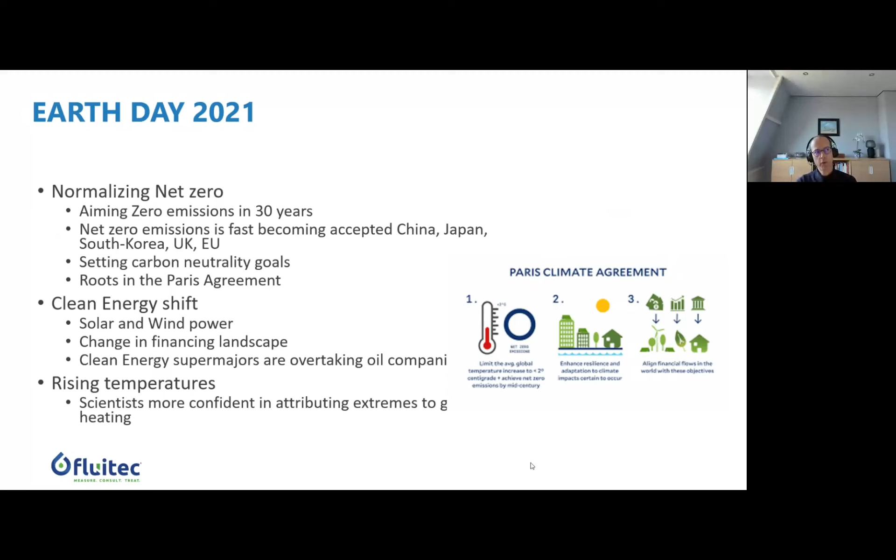And then, of course, let's not forget the super majors - there are big names working on solutions. It's not only about the two first aspects. Now, rising temperatures has been a big debate, I would say, but right now scientists are more and more confident in attributing extreme increases and shifts in temperature to CO2 emissions. If you go to the next slide, please.

In 2017, and there are probably more recent surveys, they found that 85% of large companies were reporting sustainability and corporate social responsibility in their reports. That number, I'm 100% sure, has increased over time. Interestingly, they found a correlation between companies doing something good and reporting it, as well as achieving higher performance. That's something you can see very often.

So yeah, we all agree CO2 emissions need to go down. It's a challenge, meaning a lot of large companies - names such as Ineos, BASF, Siemens, Air Liquide, Fuchs, Shell, Total, and so on - are working on solutions.

So it's good because it's coming from regulations. Obviously regulations are a big driver. A lot is happening in Europe, but not only in Europe. That's why you see European OEMs and big names here, but not only. And that is a good thing.

There are also corporations you would not have seen in the past that you see nowadays. A good example is Siemens Energy working with BASF in carbon management, leading to projects that are highly efficient, I would say, because you really have cooperation of the best minds towards the same goal.

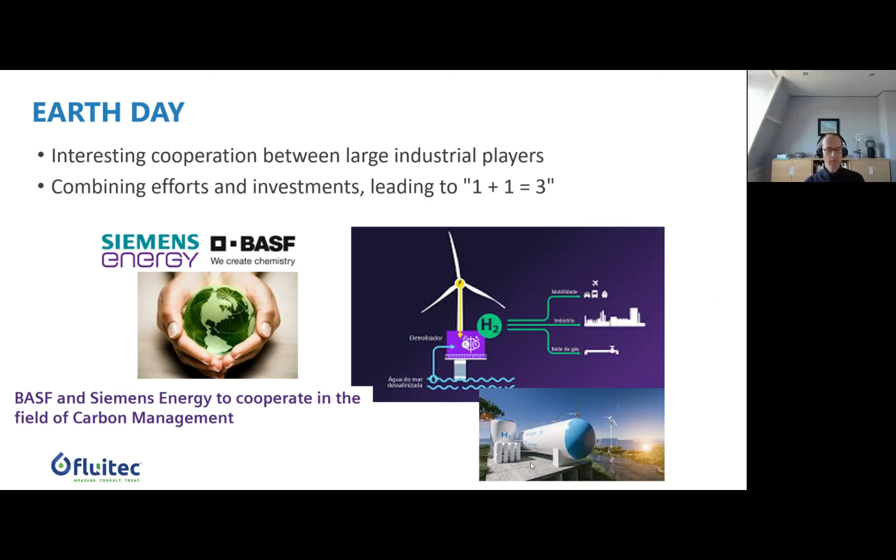So now more specifically about Fluitec. Most of you are familiar with Fluitec. If not, I encourage you to go to www.fluitec.com. Our company is 25 years old. Since day one, we have been looking at solutions that allow us to lengthen the life and improve the performance of industrial lubricants.

By doing this, there are three important aspects for us. One is technical - it needs to be superior products. Number two is return on investment - it has to be the cheapest at the bottom line level, not necessarily the cheapest at the top line, but bottom line for sure. And number three is sustainability.

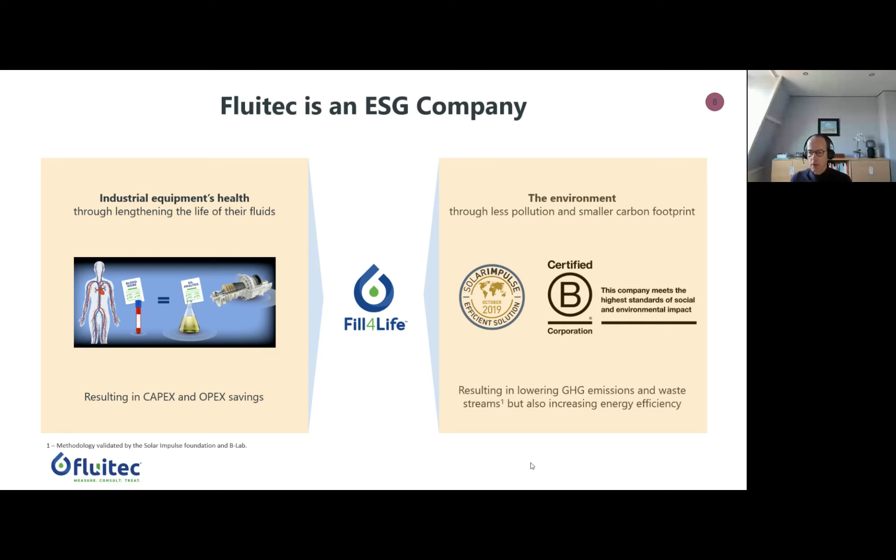Our company, with the concept of Fill4Life, is really at the nexus of industrial equipment health and environment. For us to claim that we have a positive impact on the environment, these are not just words. We have been twice labeled, I would say - the first time in October 2019 by the Solar Impulse Foundation. I'll explain further what they have been doing - great work over the last years. And more recently we were certified as a B Corporation, which I'll also explain briefly.

Solar Impulse, for those who like to read Tintin - I'm from Belgium, so Tintin was one of my heroes when I was a young kid. Tintin is a character from a comic book, and if you like Tintin, there's a professor in it, Professor Tournesol, depending on the translation. This professor is the copy-paste of the grandfather of Mr. Piccard. Bertrand Piccard is the grandchild of the late Professor Piccard. Across 3 generations, each one achieved something significant: one was the first to dive the deepest in the sea, the second went highest in the air, and the third achieved the first round-the-world trip with a plane you can see here, a solar plane.

That was a fantastic PR event. He came back, and to make a long story short, the idea afterward was: what's next? The next idea was, why don't we gather 1,000 solutions around the world that have a positive impact on the environment? So we applied, of course. It went through quite a strict process where they had to be convinced not only that you had a solution good for the environment, but also that you could make a living from it - that it was sustainable in that sense.

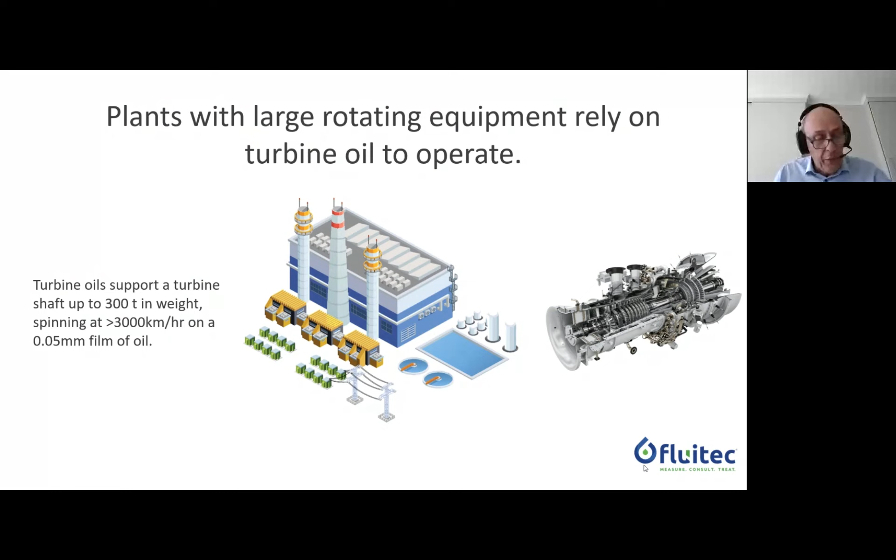If we take an example which is very realistic for everybody, it's a large power plant with volumes up to 30, 40,000 liters of oil, where a specific oil is manufactured following specifications to meet the speed of the turbine and hydrodynamic oil film. All of that has led to specific oil strategies. Over the years, luckily, the industry has moved away from a fixed time oil change interval to a condition-based oil change interval. One of the parameters used for that, as we all know, is monitoring antioxidants, as antioxidants are the number one parameter guaranteeing the lifetime of the oil, the health of the oil.

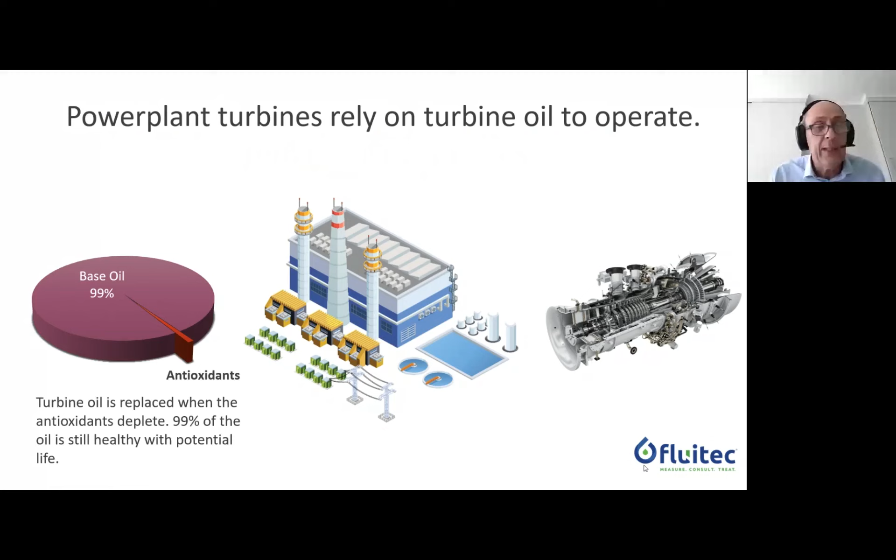So the industry is applying this parameter to understand the oil health, and it's measured today specifically in industry using RULER technology. This strategy, although antioxidants are less than 1% of the total package of the lubricant, is still a very important parameter, and has been leading to a condition-based maintenance strategy, which from an economical and reliability viewpoint is working, it's efficient.

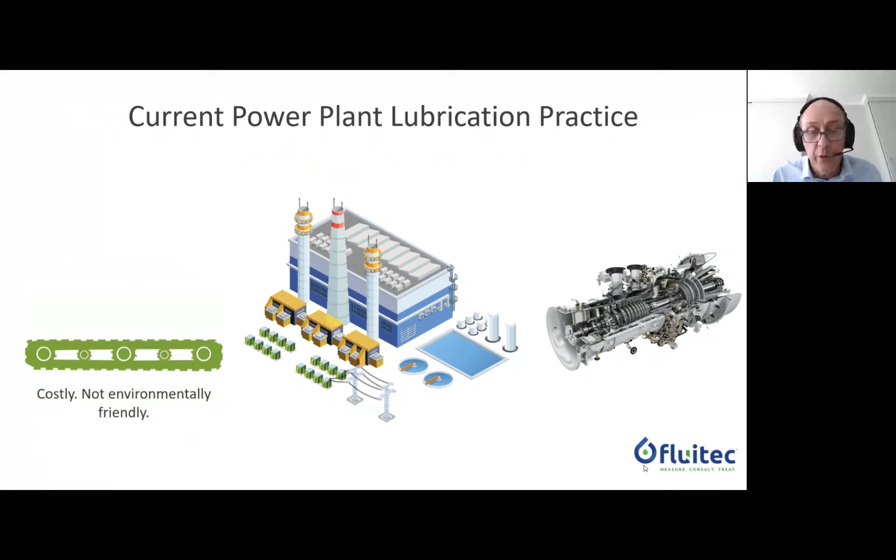But as you can see, changing the oil every time always has a cost, and we can also think about the efficiency of mixing an oil, with the impact on compatibility, or even about deposits. So over the years, we could ask ourselves, is this the ultimate? Well, no, this is not the ultimate. The ultimate is to combine economics with ecology, or if you want, sustainability.

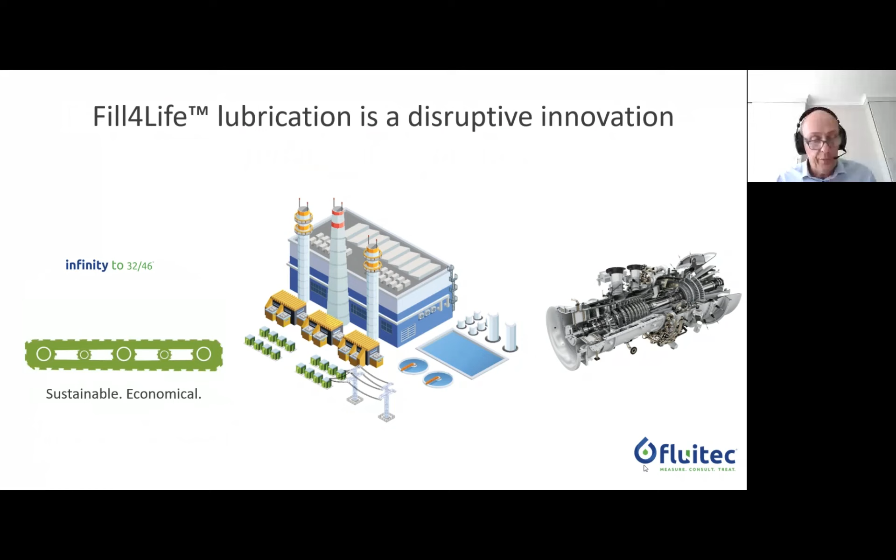And therefore, Fluitec is here as a company to introduce the Fill4Life strategy, in a wide range of industries, as a really innovative approach - for industries like hydraulics, wind energy, steam turbines, compressors, all based on this Fill4Life strategy. And like Josh was saying, and Pierre, this is our small contribution to saving or restoring our Earth.

And if you want to calculate that in metric tons of CO2 reduction or emission reduction, with a corresponding volume of over 10 million liters of oil a year, it is possible, it is achievable. It is also why the program we are presenting at Fluitec, the Fill4Life, has led to the Solar Impulse label we have achieved, as well as the B Corp link. So it is achievable, realistically it is achievable.

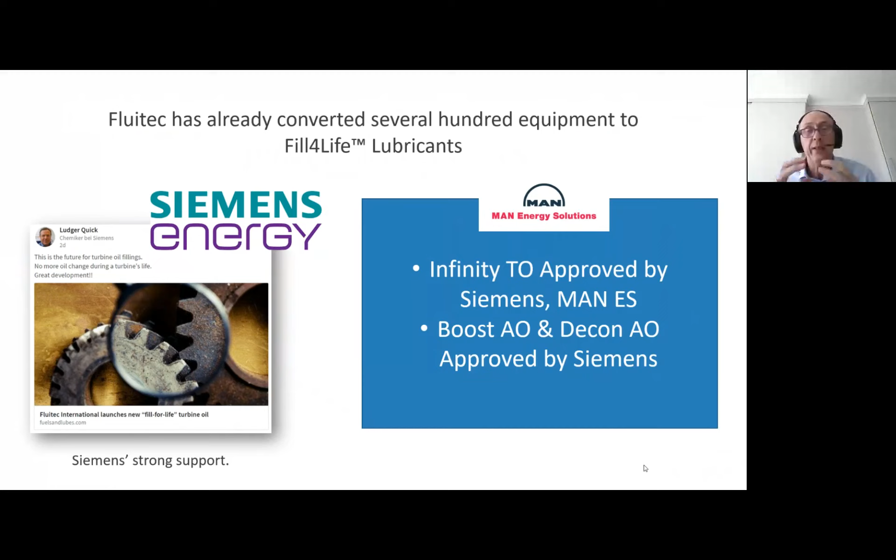And it's not only that we believe at Fluitec in that direction, it's also that over the last 10 years, we have now generated several hundreds of equipment and converted them to this Fill4Life strategy. Of course, with the approach and support from major OEMs like Siemens Energy, supporting the Fill4Life sustainable approach, or MAN Energy Solutions. We continue to innovate with them in order to meet also their sustainability strategies in a joint way, for future or existing equipment.

This was supposed to be a video that was going to show the use of a Fill4Life strategy with a major air separation company, as you can see, Air Liquide. I'm not sure this video is going to work. You will maybe not hear the sound. It's a video who is talking, and you can also find it on the link.

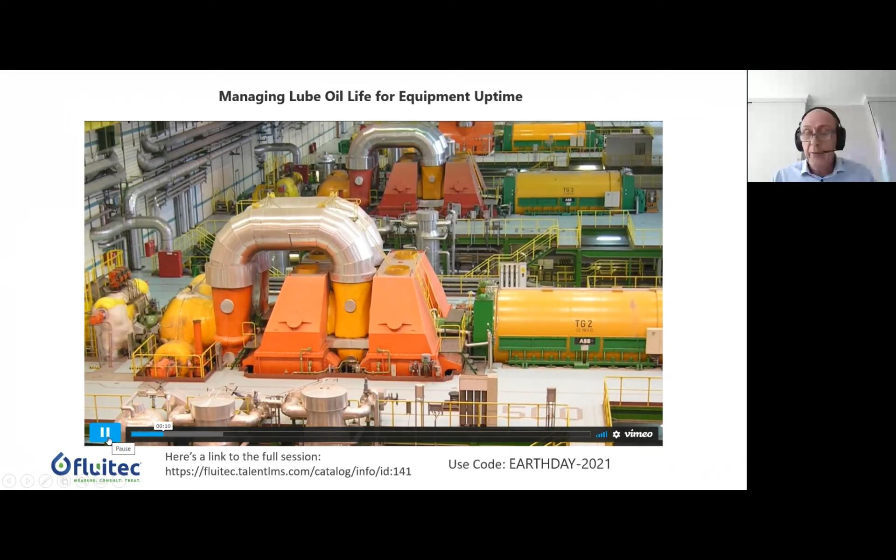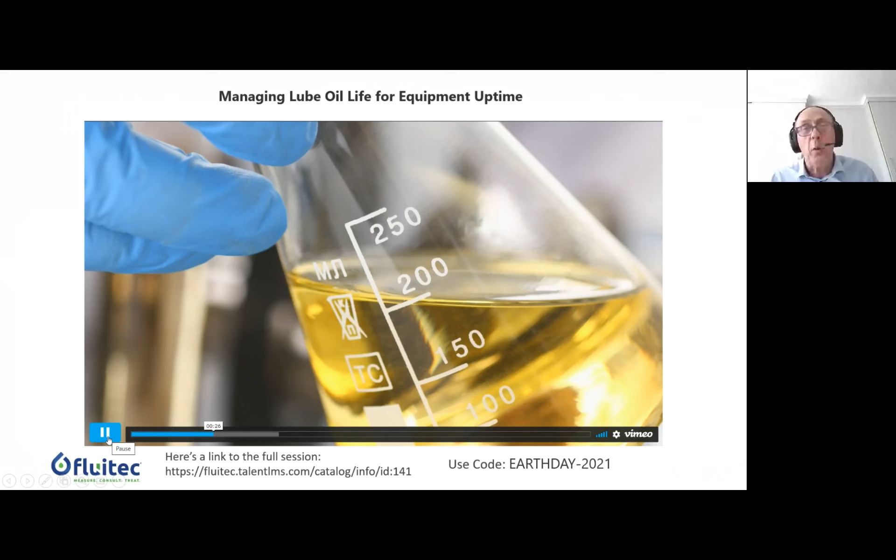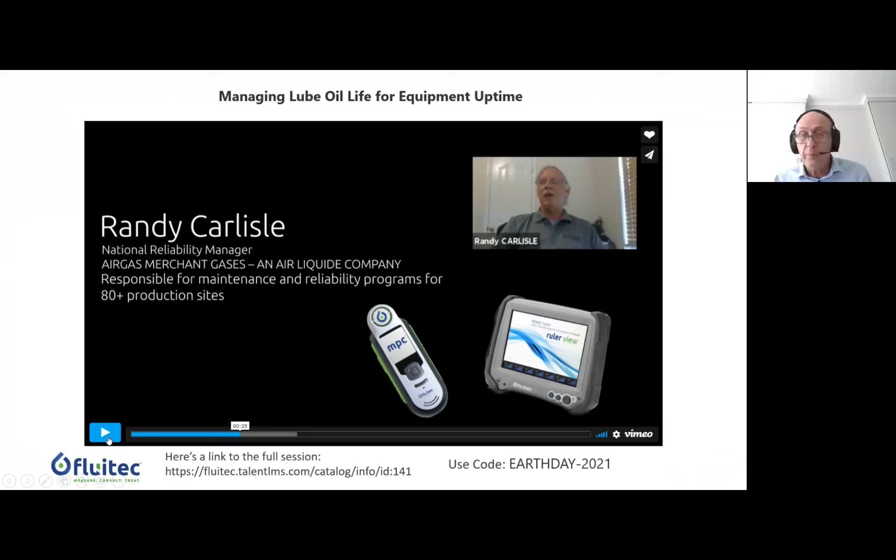It's talking about the concepts—I'll have to move to the next slide because you don't hear the sound. It's talking about the program Air Liquide has implemented for managing lubrication for all their compressors, gas compressors worldwide. I'll put the links to the video in the chat because the sound's not coming through correctly. I just wanted to stop and show this slide where you can also see the results of that presentation. That was also part of our last year international event, the Lubrication Reliability Virtual Summit, which is a strong testimonial on this Fill4Life concept.

For over more than 80 production sites where it has been integrated, which proves that the Fill4Life concept is ready to go. It's available at Fluitec. The Fill4Life concept is based on three main pillars: make sure you always monitor the lubricant, measure that. From this information you can also take the right actions, consult, and then from that consultation move to specific maintenance actions like lifetime extension, which we'll show you in a few minutes, or cleaning the lubricant and removing oxidation products. These three major steps are like the basic stones for building up this Fill4Life strategy. If one of them is missing, it will possibly be more difficult.

And the path to Fill4Life at Fluitec is paved with 25 years of experience, research, development, more than 100,000 oil analysis test results from a wide range of industries, starting in '95 until now. It has also helped us perform a lot of root cause analysis, understanding how lubricants are degrading, differentiating the degradation process.

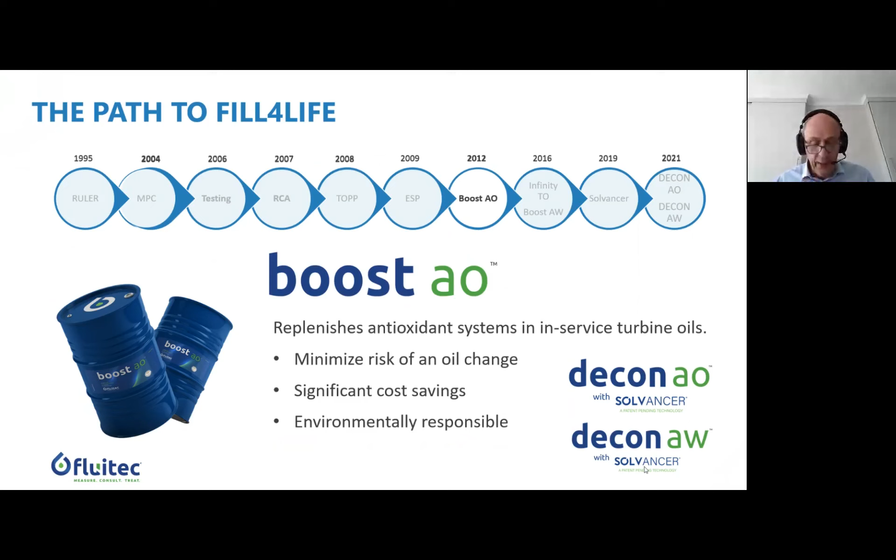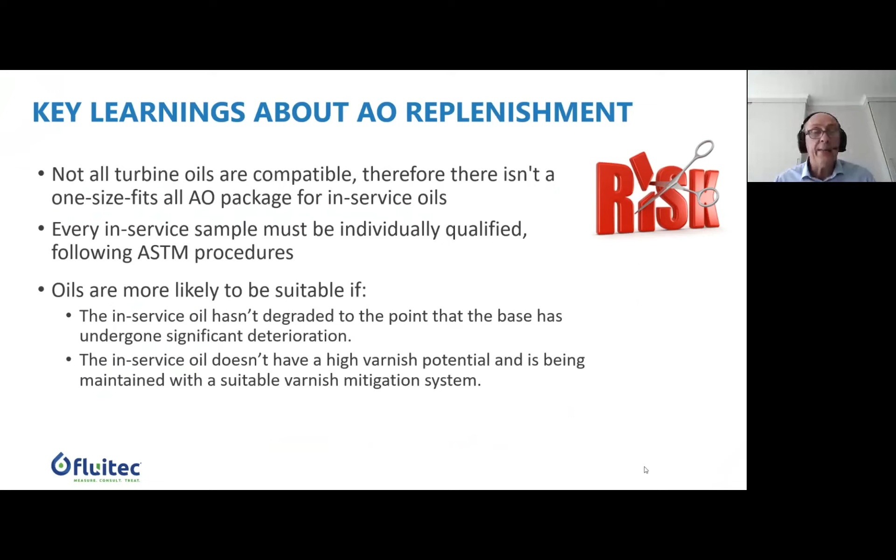And leading at Fluitec to how we could, with a specific and well-balanced antioxidant package, re-additize or revive in-service lubricants. In this specific case, Boost AO is a product used for turbine oil re-additizing. With this, you're putting less stress on the system, extending the lifetime through a balanced antioxidant package—that's very important, because there's no one-size-fits-all for in-service oils. All samples are individually qualified, following specific ASTM procedures, all to have zero-risk operation with very high safety, and also, very important, performing results.

That means if you want to compare how a fresh oil, on the left side of the graph, is showing oxidation—the green color versus the blue shows the degraded turbine oil. If you then compare on the right side the same formulation of oil which we have boosted with antioxidants, a well-balanced antioxidant package, and stress it again under the same conditions, you will see that the lifetime expectation of this lubricant has increased by approximately a factor of 3.5, because you specifically looked at a well-balanced package of antioxidants.

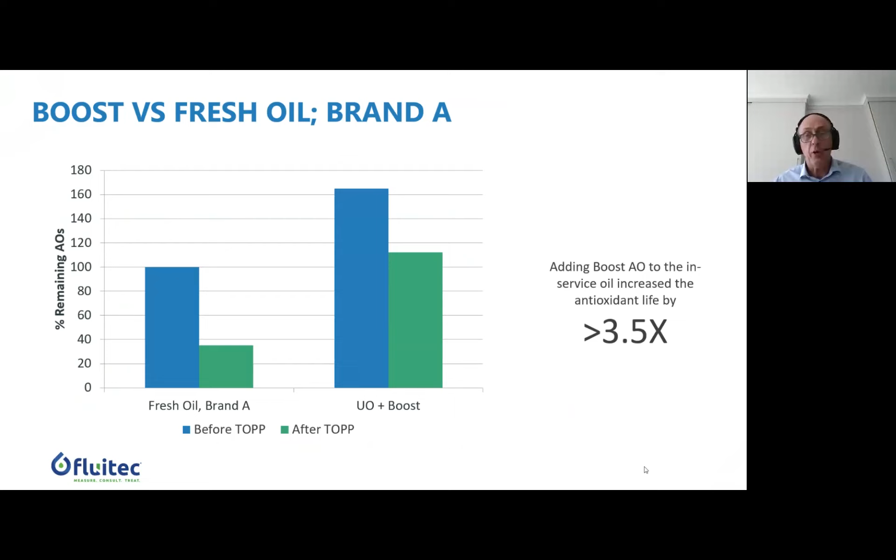That is the strategy where, like in this case which I will come back to later—this was a milestone for Fluitec, the first Boost AO exercise project we've done at Fluitec—it was at that time a gas turbine performing at approximately 30% remaining useful life, or remaining antioxidants. At that time we decided to do re-additization boosted with antioxidants, and the goal, the target, was to achieve 100,000 operating hours.

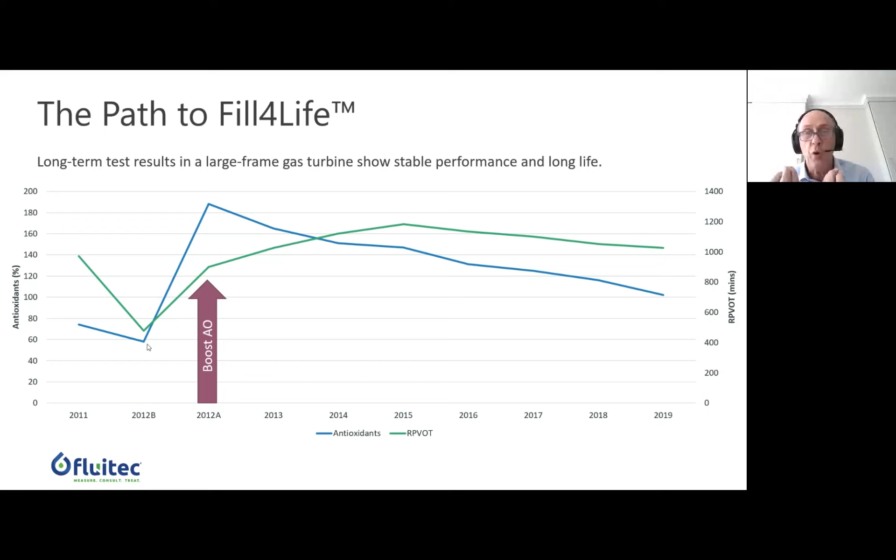We are now in 2021. You can see from this graph that the correlation between antioxidant depletion and RPVOT shows a very stable and gradual depletion, a controlled oxidative life, and with this we will achieve even more than 100,000 hours.

To help you understand how this is implemented today, Pierre and I have selected a few examples, but first, I believe, we are going to have a poll before we continue talking about the cases, if I'm correct.

Yes, thank you, Yo. So, we'd asked before whether sustainability was part of your own KPIs for the department or the company. Our next question is more or less aligned with that: whether it's a bidding process or buying process, when you look for new products, how significant is sustainability when making those decisions?

It's a question that comes up every day, becoming more and more actual. I'm very anxious to see the results of that poll. Meanwhile, I'll take a little sip of my water to lubricate my voice.

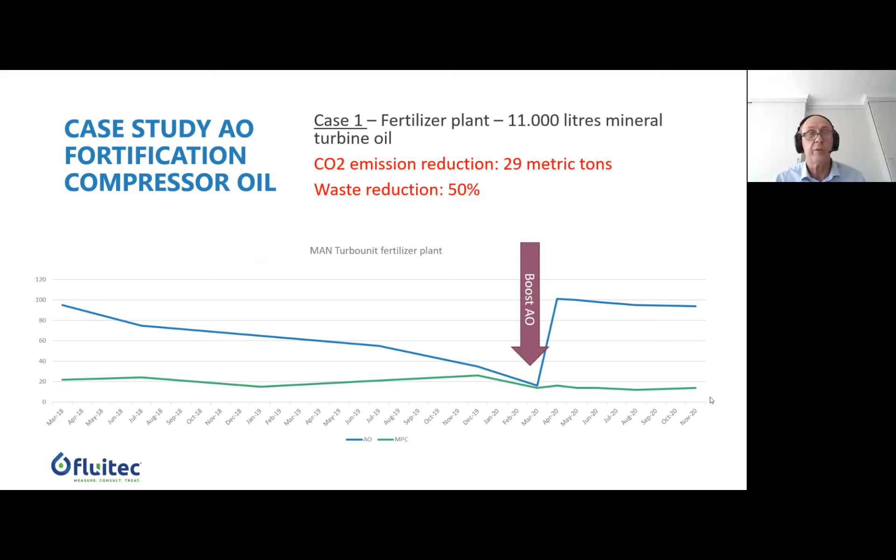Based on that estimation, we can see what this means in emission reduction, about 29 metric tons. Interesting also is that more and more large power plants are not always able to plan their revisions, depending on availability and their production program.

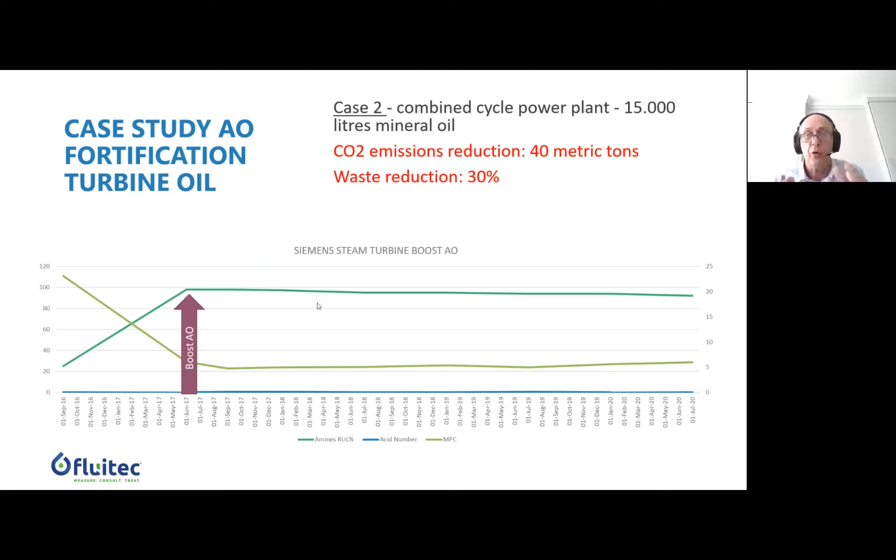I show MPC to demonstrate that compatibility and deposit control are also in check here. Oxidative control and deposit control are two corresponding parameters.

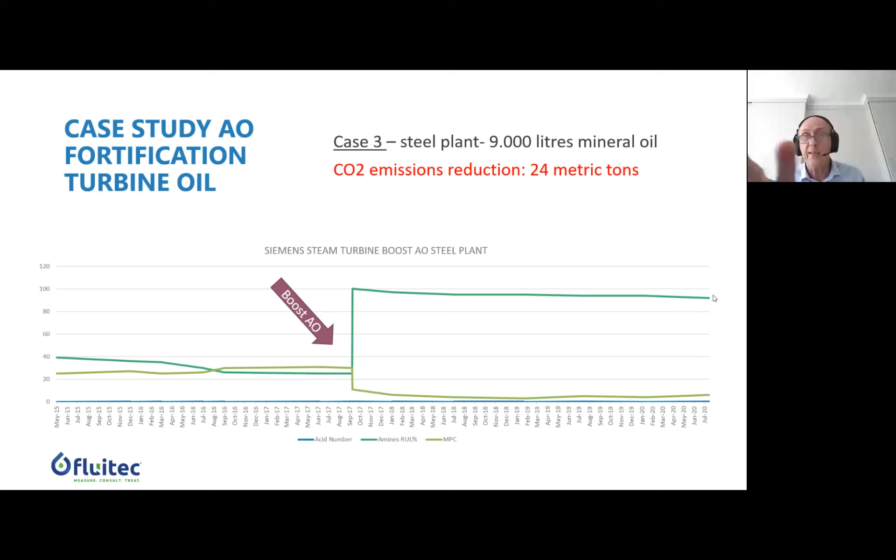A steel plant is another continuous production process where avoiding shutdowns is key, especially when unplanned. In this case, there was also an antioxidant level approaching 25%. About 6 months before revision, it was decided they could only have a minor revision for mechanical control, and at the same time it was boosted with AO on this steam turbine. Deposit and oxidative control were extended and well controlled. For this 9,000 liter system, we will probably achieve another 24 metric tons of CO2 emissions reduction, in an industry totally different from the first two.

We have a question from Ken: what compatibility tests are run for steam and gas turbine oils, and are they different for Group 1 and Group 2?

We base ourselves on ASTM D7155, and we add to the specifications major oil parameters like RPVOT. We also look at water separation, air release, demulsibility, foaming, rust, and antioxidants. It's not only a matter of understanding if you're having a good response of antioxidants, but also that they're not creating a negative reaction. It must work synergistically in a positive way, creating a good oxidative response.

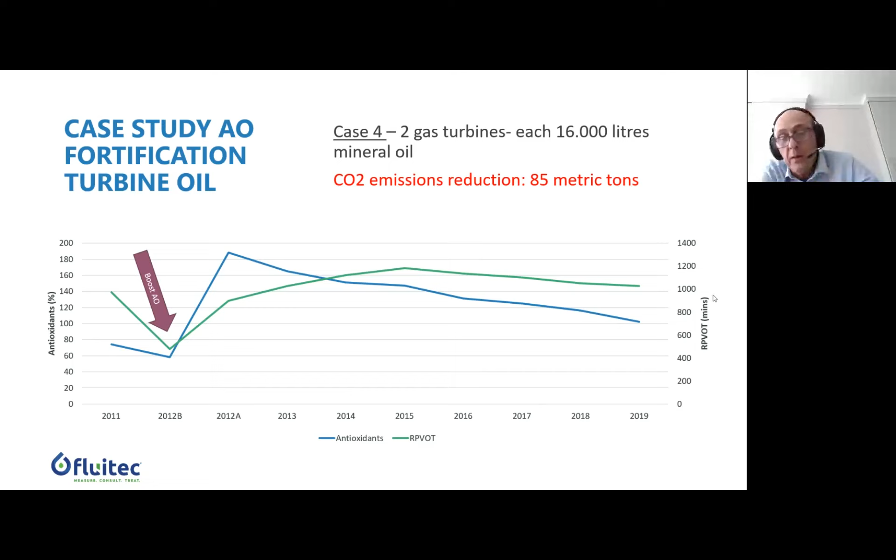In 2012, like I told you, it was at the moment to change the oil, but it was decided to extend that and approach 100,000 hours. We are now in 2021, and I've been told this oil is still in service, so we will have overreached 100,000 hours and go even in the direction of maybe 200,000 hours. So it is realistically feasible with this process of the Boost AO product that Fluitec is presenting.

Now, of course, the path to Fill4Life doesn't only consist of good condition monitoring and taking the right maintenance actions. It's also important to make sure that when a lubricant is degrading, when antioxidants are consumed, you are removing the oxidation products or the consumed antioxidants. There too we are the leader in bringing technology to market which extends the life of the lubricant. It's not always a matter of removing varnish, but also just normal oxidative degradation of a lubricant.

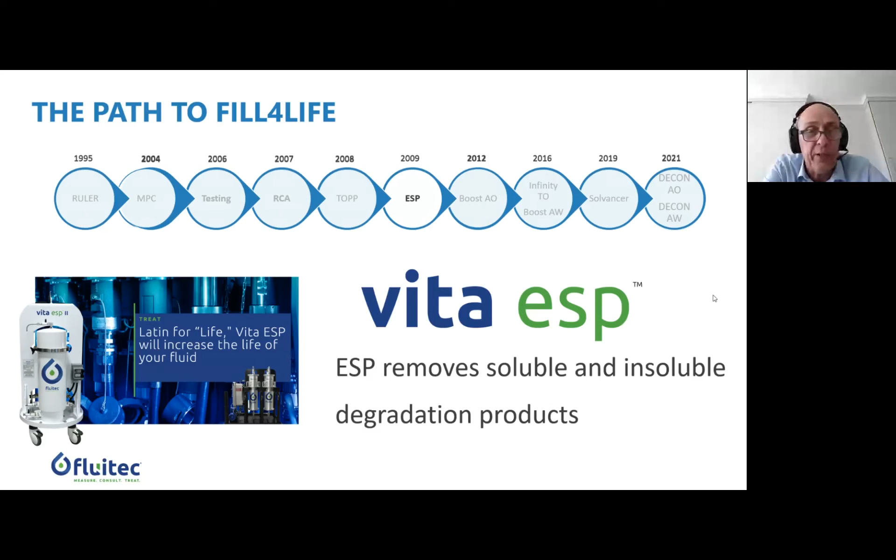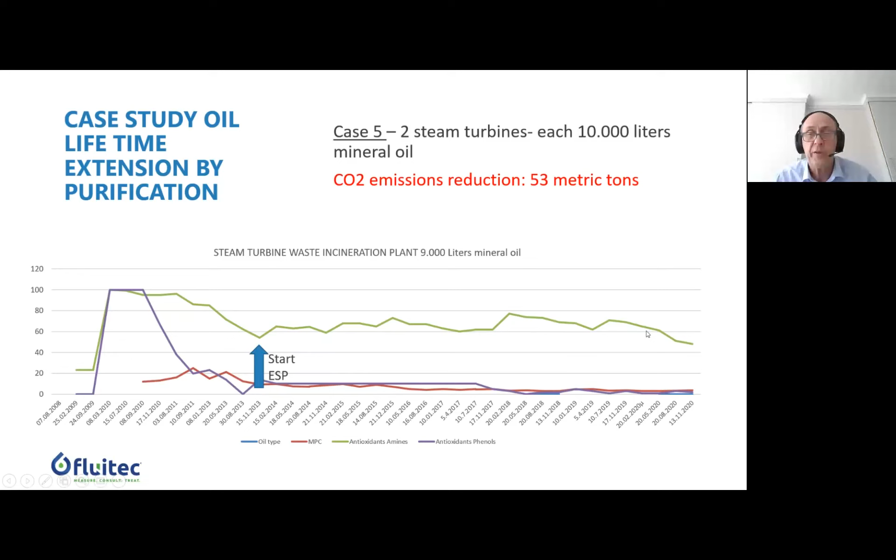And you can see that from there on, from 2013 until now, which is more than 7 years, it's still the same lubricant. You see the different regime of oxidative depletion on this lubricant. So that plays also an important part.

The path to Fill4Life, along with all this information from many hundred thousands of oil samples and test results, made us start developing our own lubricant to fit this Fill4Life strategy. Not only having correct oxidative control, but also optimum deposit control, which helps achieve, I would say, even an equal lifetime of the equipment.

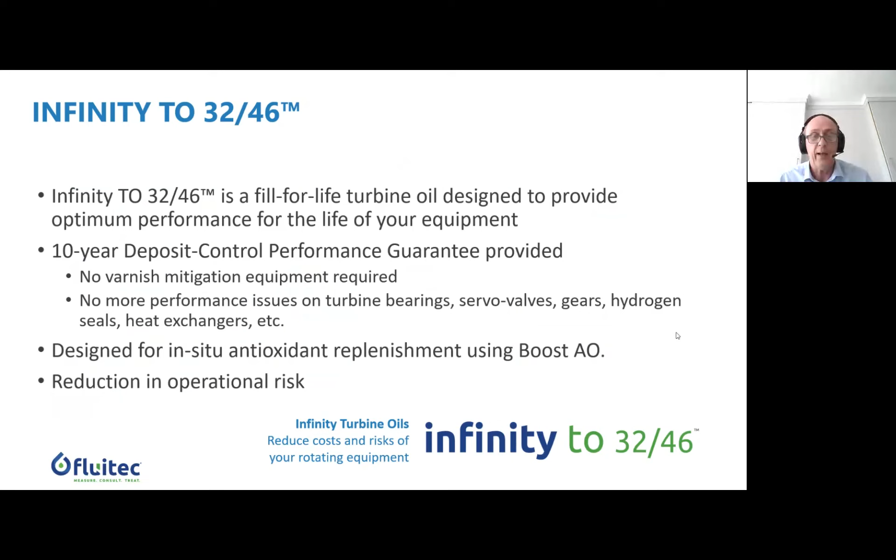This is the Infinity turbine oil, available today on the market, designed really for fill-for-life operations. It has a 10-year deposit control performance warranty, and also very important, if you want to go for longer life, this is a technology developed for replenishment with our own Boost AO. So it's balanced together through the development of the product, and the operational risk is absolutely totally under control.

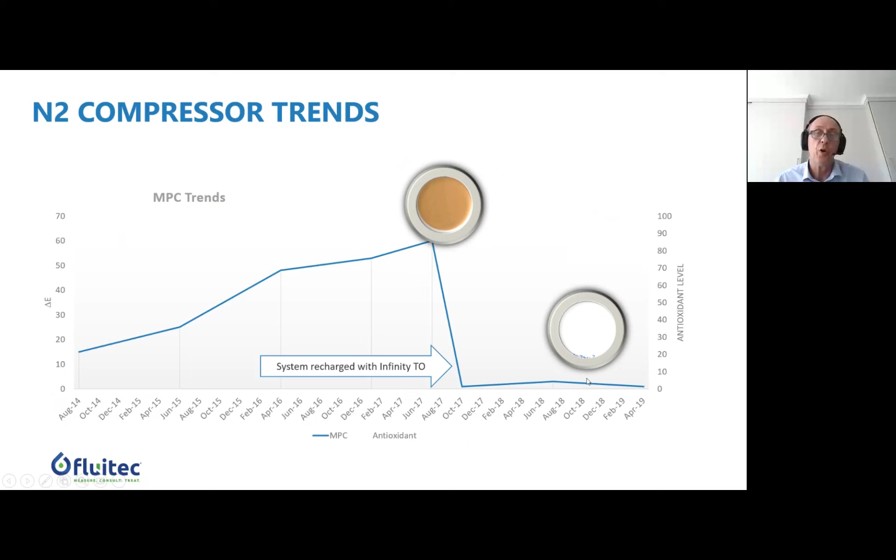To show you some of the case studies we have today, this is one of the very early case studies we've had with Infinity. This is a large nitrogen compressor where initially we could see how deposit was a real issue. Integrating Infinity turbine oil in 2017 - we should update that graph, I got it until '19 - you can see how deposit is very well controlled, and also how antioxidants trend after making the recharge with Infinity turbine oil and taking the right actions, giving very good control of the antioxidants in comparison with this cycle.

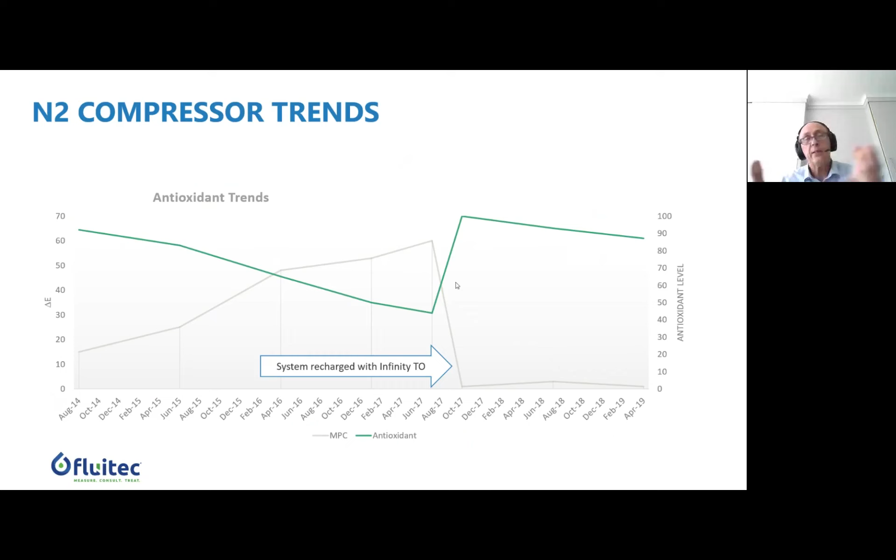So this is the Infinity turbine oil strategy, which can of course also be applied for compressor applications. Remember also that the whole realization with Boost is not only for turbine oils - I want to emphasize that - it's for a wide range of industry: hydraulics, and think also about a lot of mining fluids.

I think we are right on timing, Josh and Pierre. So I would say, today we are here to talk about how we can bring our little piece, our contribution, to restoring the earth. So my action is here. It's time for action, and time to answer your questions. So go ahead, Josh.

So do we have any questions out there? I know that Ken asked the one on compatibility, and you answered that before, Yo.